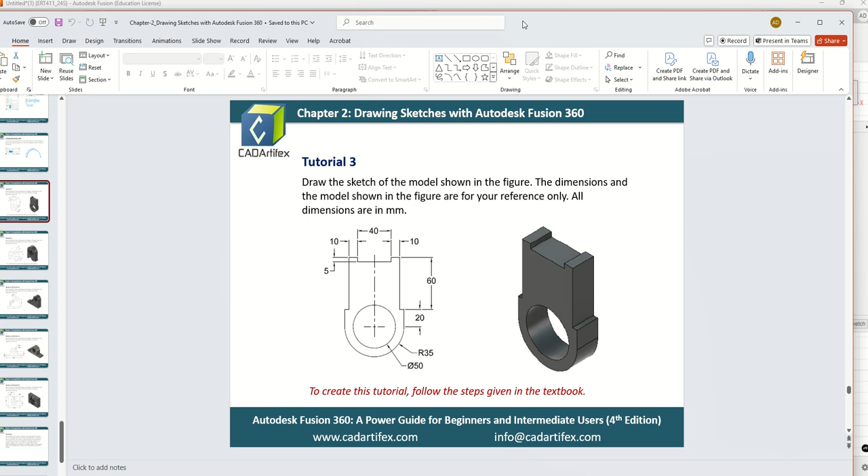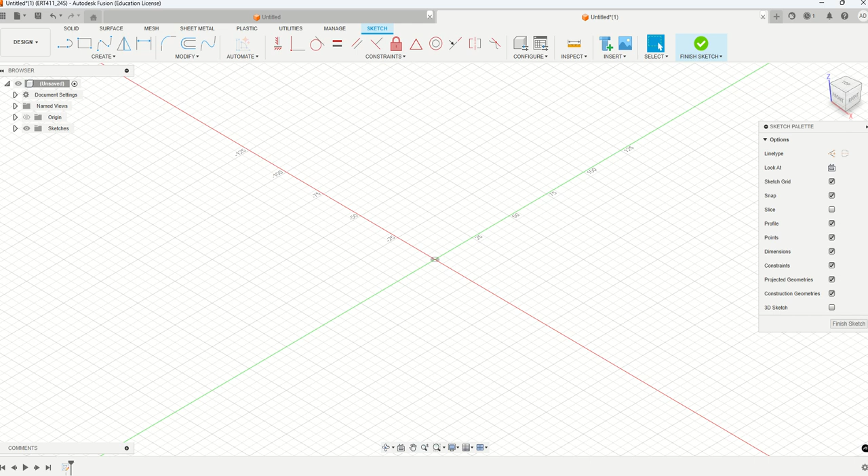Move this out of the way. And let's go, we're going to sketch this one from the front plane. So I'm going to select front and sketch. Front and create a sketch. And let's go here. So what have we got?

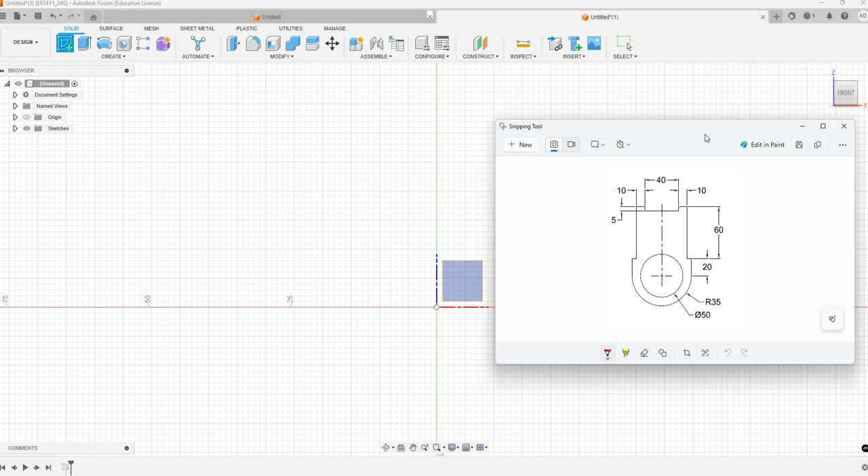We've got a circle, inside diameter of 50, outside diameter of 70. We've got a rectangular shape with a step to it. This one has a center line, so we'll look at drawing with some center lines, just showing how to actually add those.

So we're going to say create sketch. If you draw a line and actually change the line type over here to a center line, you can draw a dashed center line. You'll see how that's like a little dashed line as a center line. You can draw that as just a reference line, and we'll just use that as a reference point for things, so we can dimension to that line from now on.

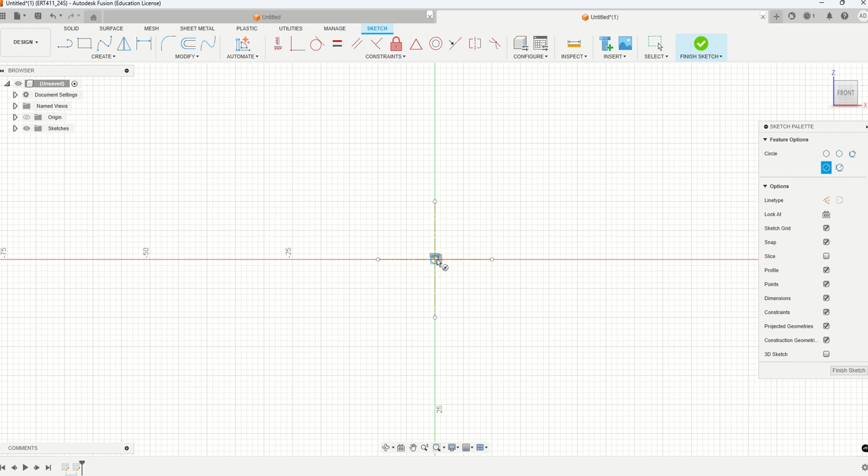But let's start with drawing our circles. So we have an inside circle. This one is diameter 50.

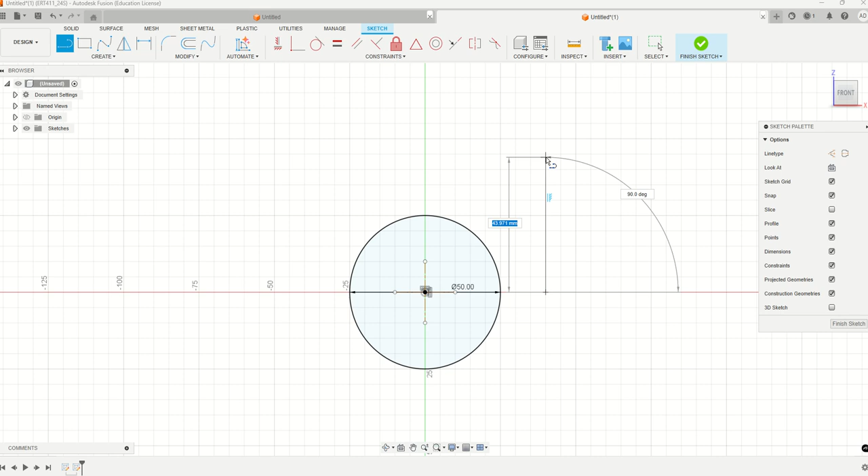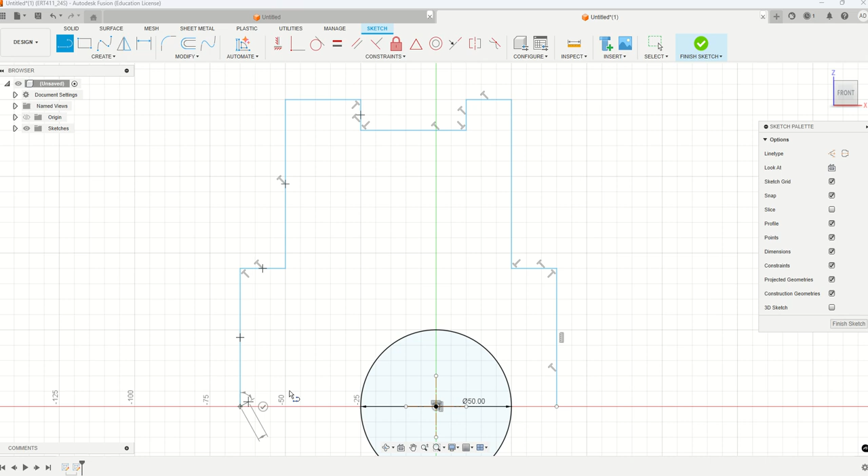Just like that. And then my shape on the outside looks like, I'm just going to rough draw this. Kind of looks like this. And then, again, drawing a line or an arc. Actually, let's just draw this the way that we know how to do it, that's the best way. We're going to draw another one here, which is going to have a diameter of 70.

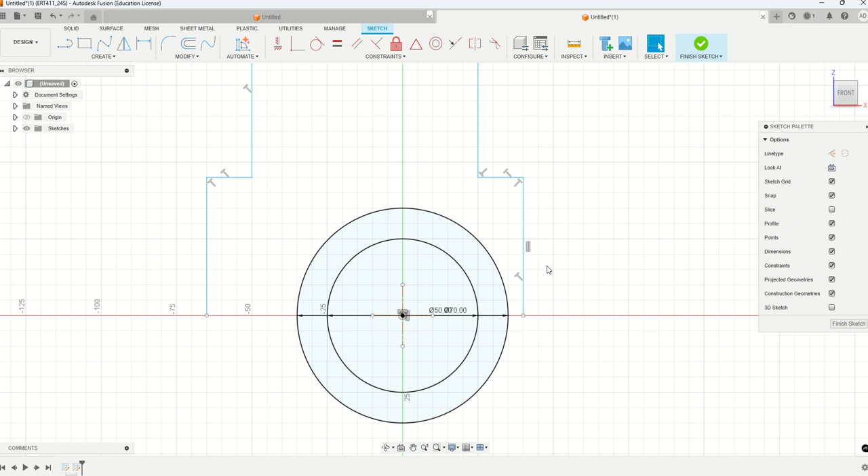So let's draw that. Alright, so let's move some stuff around here. This point here, let's drag this over here so it touches the point of that. And let's start adding some dimensions on here, so we know from our dimensions,

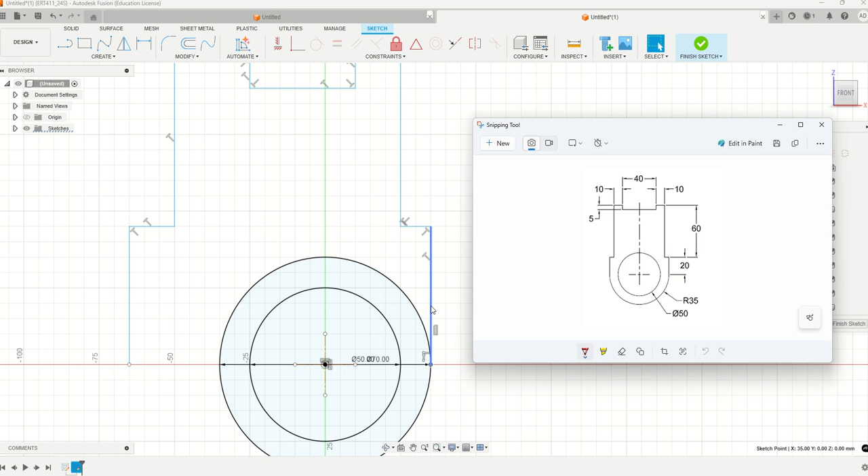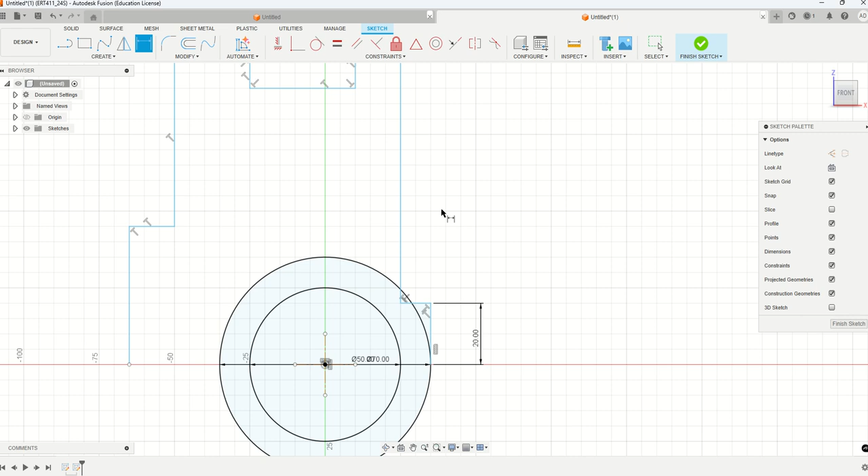this is going to be a height of 20. So from here to here, there to there, that has to be 20. Then this step that goes in, actually I don't know how long that is, but I know that from here to here is 60.

From here to here is 10. This actually comes down like that, that dimension is 5. It comes down by 5.

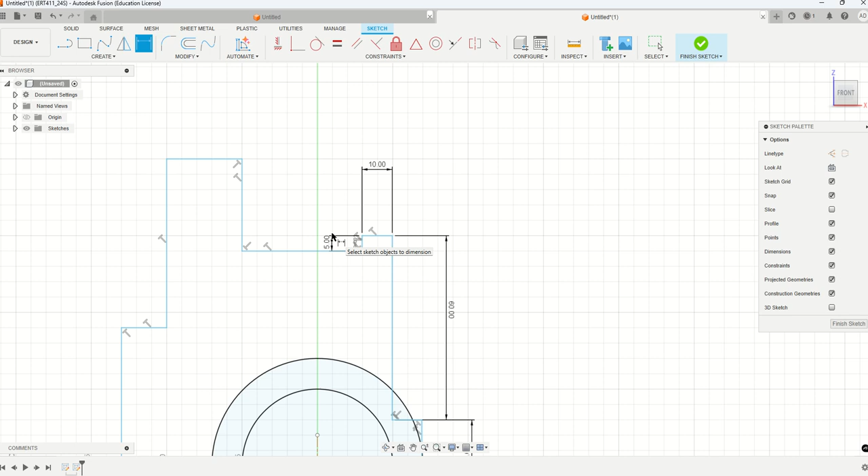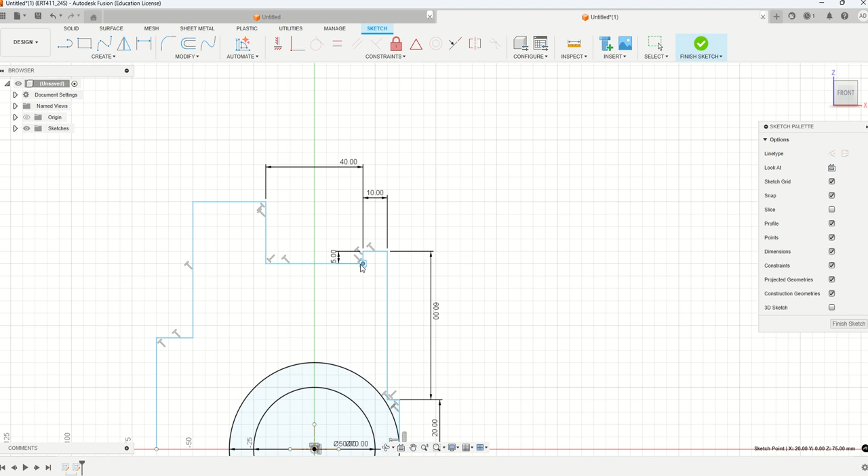See how it accidentally moved this on me here? So we're just going to move that up to there. This distance across here to here is 40, and this is actually centered on here, so let's make that centered on there. I can eyeball that with the grid. That's 20 that way and 20 this way, so I'll keep that centered like that.

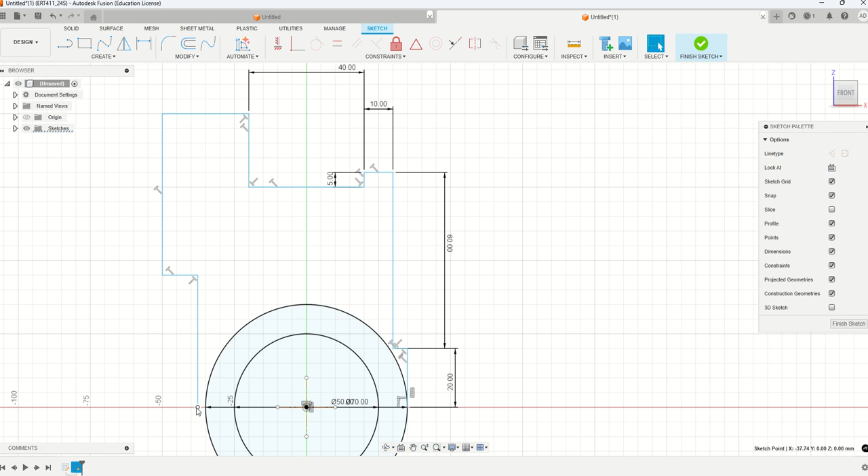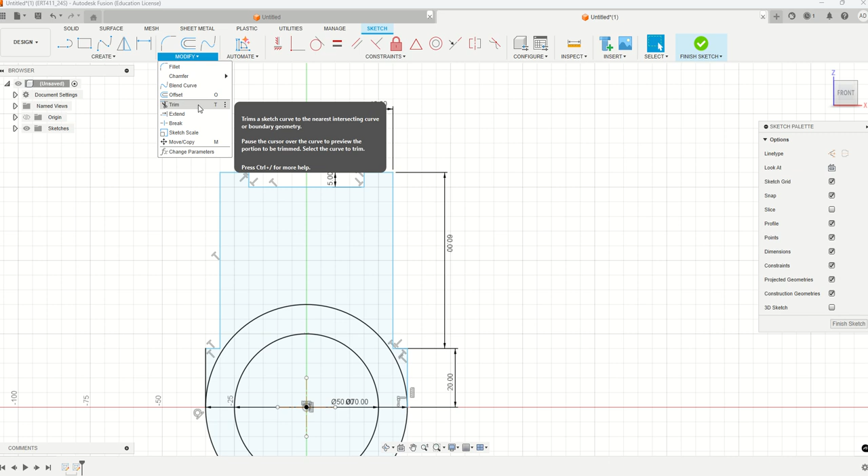And just looking at this, I can tell that is our basic shape. And now this arc right here, I'm just going to cut that, trim that off, and I think that is all of our sketch dimensions. You can tell it recognizes that as a hole in the middle if it shows up in a different shading. That means everything is complete out here.

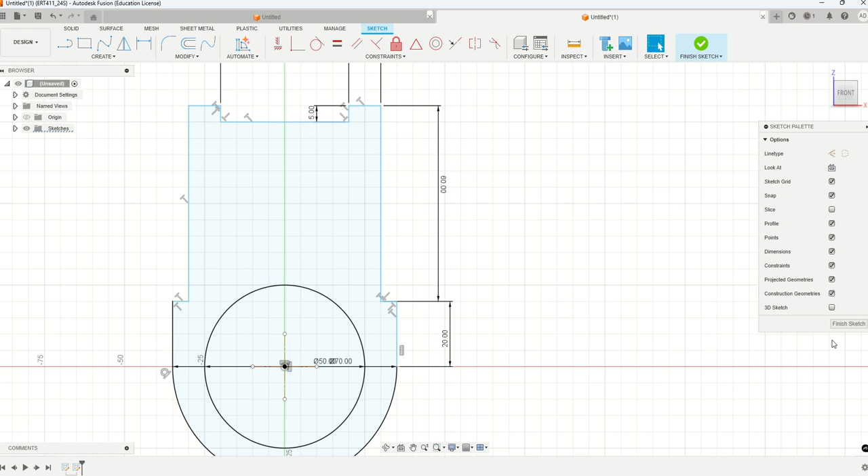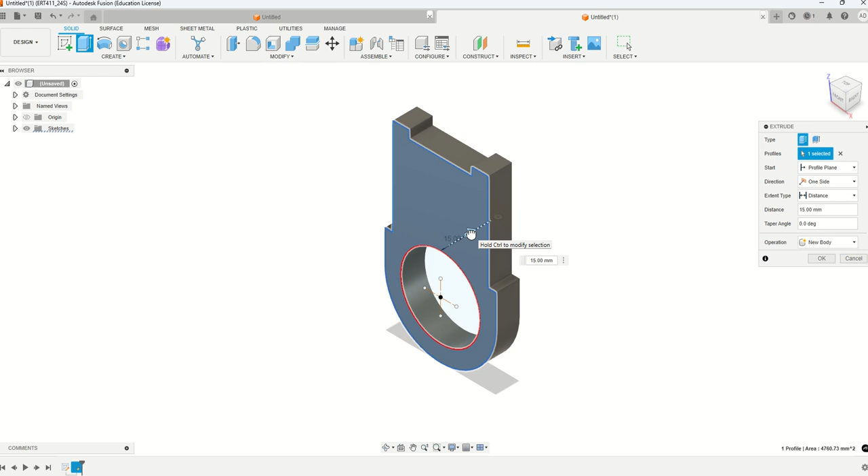I'm going to finish that sketch, and it looks like that. If I go into that dimension, that actually gives me the ability to extrude that if I wanted to. I could extrude that whole thing like that. Okay, and that is my shape. Okay, so that is this one completed.